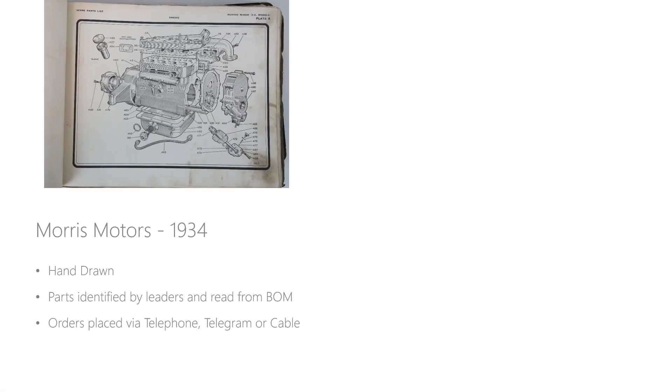As I was saying earlier, things haven't really changed much in the last 80 years. Morris Motors had hand-drawn diagrams. Parts were identified by leaders and read off a bill of materials and ordered by telephone or cable. Fast forward to 2019, not much has really changed. 2D exploded drawings are very time consuming to create, and again the parts are identified by the same process, read from a BOM and ordered by telephone and email.

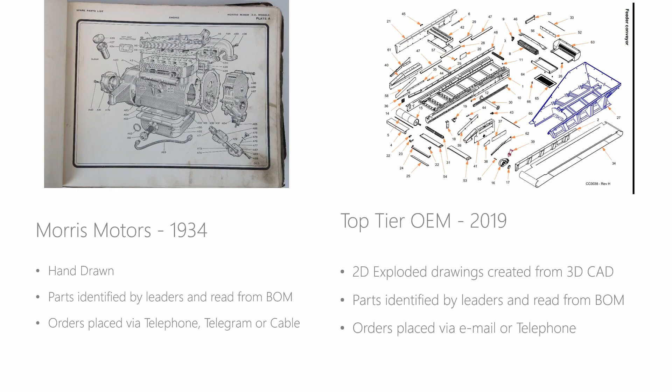Fast forward to 2020, what we're trying to do is create a whole new category around the aftermarket division by creating 3D part manuals from a company's native CAD files and assets. We really reduced a lot of the downtime, which I'll go into in a moment, but we stitched together that whole process and made it a lot more intuitive, as you'll see from the demo.

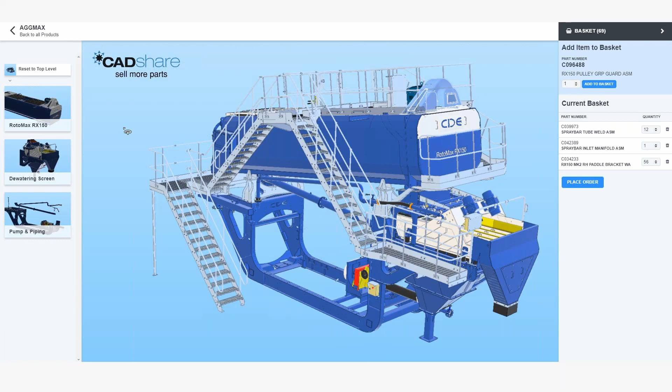You've got the actual 3D model, and you can click on a part, and that will link to your parts data, and you'll get a notification of the part, the stock level, and price. We're trying to build a whole ecosystem around the aftermarket. Obviously we have the cloud software, which is strong for part identification and ordering.

We're building on all of the business insights and analytics, because we're capturing that data in the back end, so you're going to be closer to your customer and get more insights into what they're ordering from you. We have a full technical documentation library that you can attach different file types and videos to those models, plus open APIs as well.

We built CADshare in a way that's customizable and links into a company's tech stack, whether it's their PLM, ERP system, and so forth. We're just that layer inside the process to make it easier to order the parts, so very flexible in that way.

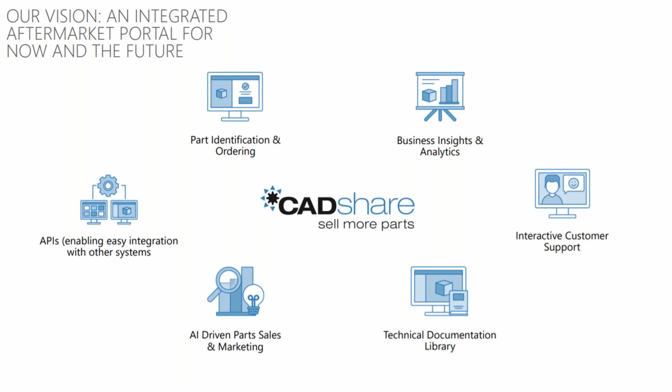So just a couple of the main points that CADshare really helps with. One of our main headlines is we're 90% faster, so we reduce 90% of time for resources to create this technical authoring.

In the old way, you had to pull together all of the BOM data from a PLM or Excel, which is quite slow. Then you had to edit that part data and description data because it wasn't in real time, wasn't pulling through from a database, so the two didn't link up as well. And then you had to create a lot more exploded views, which took a lot of time.

Coming forward into CADshare, engineers just prepare a pack-and-go file. It's uploaded and ready to use in 5 minutes. It's their native CAD files that we put through the translator in Autodesk Forge, creating those models. So there's no real CAD skills needed, and no need for a high-spec computer, because everything's done and processed through the cloud.

Around part identification, we're 85% faster than the old way, and we reduce wrong orders by up to 95%. There's a lot of value in being able to order parts from the customer or dealer point of view—they can go in and locate those parts with ease, rather than digging through a parts book to find the relevant part, which may well be obsolete by the time it's published after 6 months.

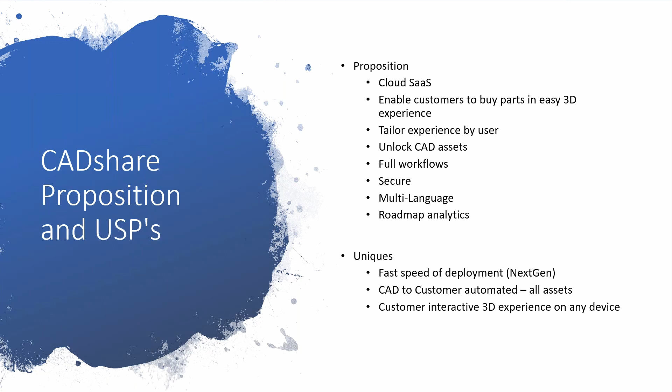What we do really is take all of your native CAD assets and reuse them to create those 3D catalogs with ease. And then you have the full workflows, and it's very fast to deploy, with low cost of setup as well.

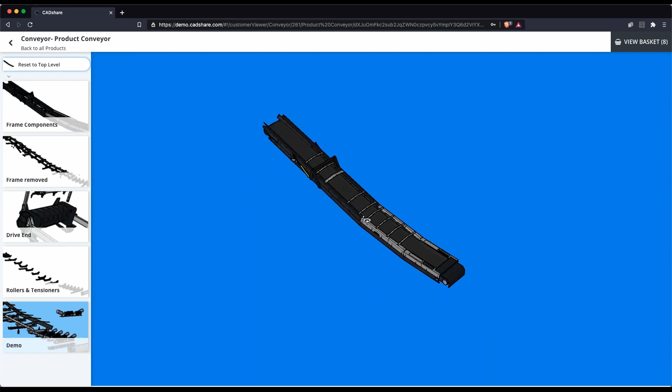So then into the actual viewer. Your customer will log in here. This is all live, so that's how quick it can load. The customer can zoom in and out, they can pan, and they can rotate, all using the mouse or a touch-enabled screen.

When we get here, you can see the whole model, it's got its full context. It's not initially exploded, it's not hard to understand where the parts are. You can quickly see if it's an exterior part. I can just click on it, it'll pop up, tell me what the item number is, give me a description, and I can add it directly to my basket.

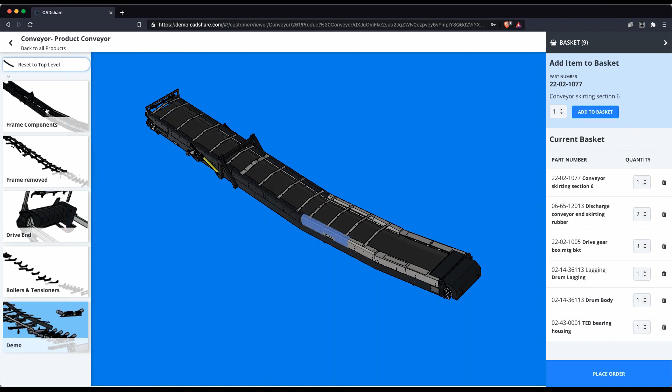Then we can simply use the snapshots on the left-hand side to step down into different views that are created using our system. These again make it so you can show and hide different parts to make it easier to find the one you need. If we take this one here, it's hidden and moved us down into another part of the model.

You can quickly see here that we can enable assemblies. So for this part, you can buy the individual wing roller, or you can select the assembly and purchase the whole impact rollers. That's good for parts where you can buy the whole assembly or not.

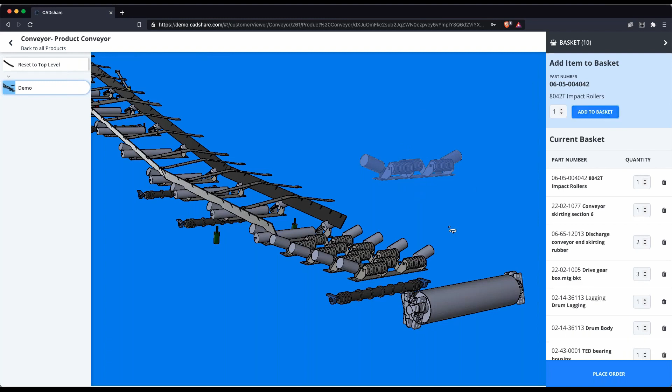Also, we have the ability to select options within it. So if they have different types of coating or materials for the different parts, these are easily set up so you can purchase the different types, and they all have a unique part number within the system.

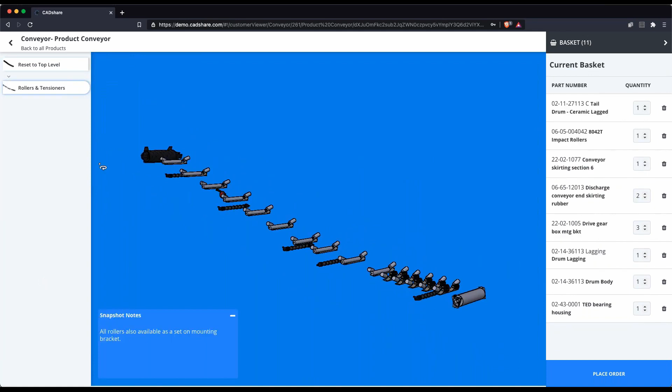Those all just make it a bit easier to step down through and see the parts in the system. You can also add notes when you're looking at a view to explain something about the view or what the customer would need to understand. You can also turn on ghosting, which keeps that context of where the part is within the whole machinery.

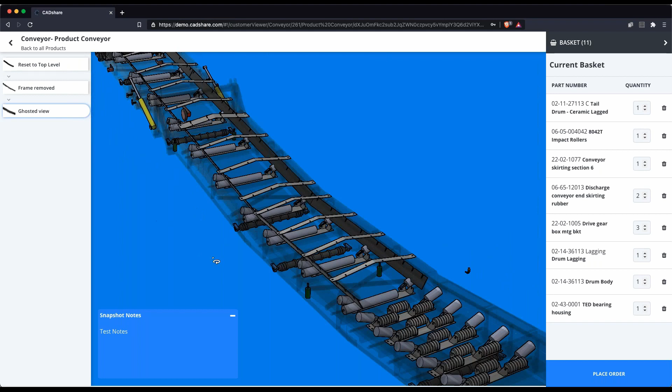This is one of the things that helps massively reduce wrong orders, because with this I'm able to say these two parts here were slightly different in my model. I'm able to make sure with the context of, okay, it's the one just below the three runners, that you can get the exact right part. This is one of the big things, because you keep all the context within.

While in a traditional 2D part manual, you'll be looking through the pages and you don't know, is page 57 this section up here or this section up here? So this keeps that context for the user.

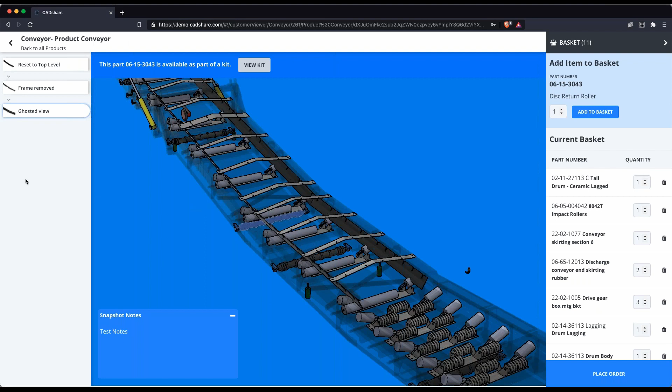Once I've added all my parts to the basket, I simply click through into the basket page. Just your standard Amazon-style order page. I can see all my parts that I've added. I get some details of where they were added from.

Oh, sorry Max. Can add a comment to just check that this is the lagging for processing sand, just to make sure.

Add that to the order, and the manufacturer will then see that. Enter in my requested delivery date, and as simple as that, you submit your inquiry, and the manufacturer will receive an email to say the order's been placed, and they'll be able to respond with a quote immediately within the system.

Also here, you can see technical documentation. This is one that's been linked to the part individually, so you can see how I change it or add it, and it'll link directly to the right page within the PDF manual.

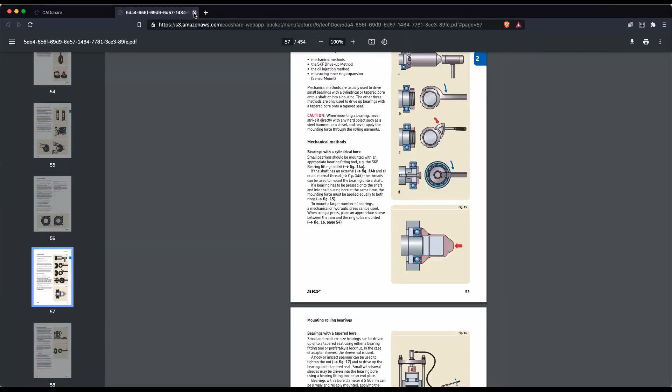So that'll then get sent over to the manufacturer. Once they respond with a quote, we'll get an email to say a quote has been sent. We can log in, we'll see the prices, shipping, and then we just simply enter our purchase order number and place the order, and that's it done.

It can be as quick as 5-10 minutes to get the order placed and processed through. And the same, you've got the live order history of when it's being shipped, and your order history is all there in one place for your customers to track and see how things are going.

Especially for dealers, we have a part search, so most of your dealers will already know their part numbers, and we find that they don't necessarily always want to go through the 3D viewer to find them when they know, oh, I just want 74402. So they can just do their search, pop it in, it'll bring up their part, they can add it to their basket. And similarly, we have their most frequently ordered and most recently ordered parts, a list of them, just to allow them to do things quicker and easier.

So that's the customer side of the product. As you can see, it's very simple, very straightforward, and very easy to use. And we'll just log in as the manufacturer.

So similarly, first thing they will see is they get their orders. I can see the inquiry that was just submitted. So I can come in, prices that I have ERP data for will auto-populate with their price. Any others that haven't been used in the system yet, I can just pop them in, and then just check the price, sanity check them, add my shipping or discount, and I can view my comment that was sent to me. I can respond back to the customer.

And then the other part is creating our technical authoring. So simply I'll find the one that I showed you in the demo. So log in here, and again, same sort of functionality, move, view, zoom.

In here, we also then have the parts, all the parts in the system through the model tree. So we can look through and we can choose which ones are shown or hidden by simply turning it on or off here. We can lock parts as well.

So if there's an assembly and we don't want, a lot of times some of the assemblies will be your holy grail, so you don't want people looking inside it or looking beneath that level of a part. So you can just lock it, and then whenever I try to select it, that's all I'll be able to select. I won't be able to go any further down and see the other sub-assemblies. That's just locked.

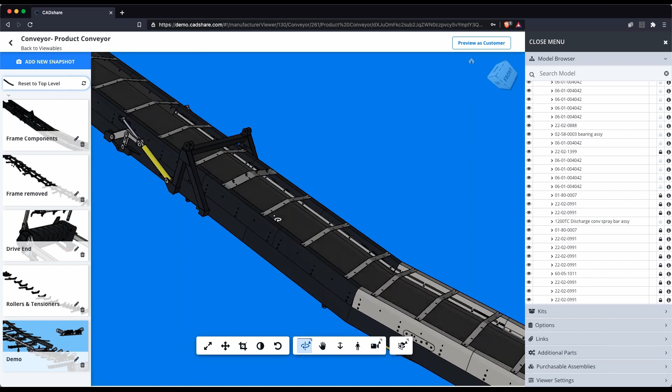And then to create one of the views on the left-hand side that we've shown, you simply move the model into the shape I would like it to be and hit add new snapshot. That will quickly save it. And then from now on, if I click that, it'll bring me back to that layout.

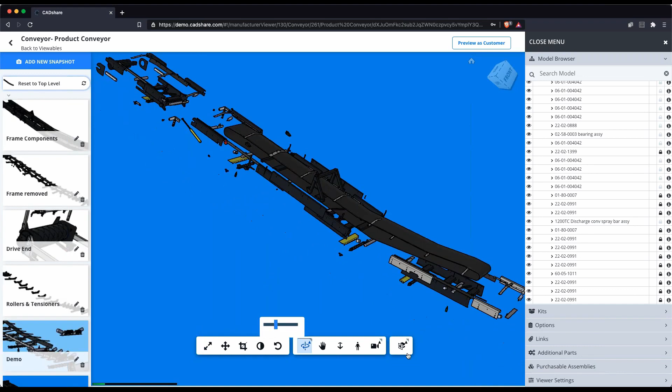So some of the things you can do for those layouts, we can quickly explode parts. That will allow us to see an exploded view, and we can tailor that up to lots of explosion or a little bit less.

We can translate parts to create our own views very quickly as well, by just simply clicking and dragging them into the position we want them to do, make it easier for the customer to identify them. And then, as I mentioned earlier, we can turn on the ghosting, so it'll show where the part originally was when you've moved it out of. So it's a lot easier than an exploded 2D drawing and an arrow hopefully indicating where that was previously from.

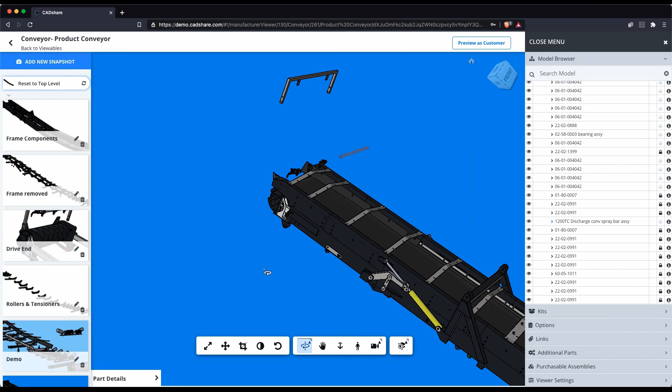But it's as simple as that. Normally, we can make a full manual in this way within about 15-20 minutes. It takes a lot less time than a traditional 2D document to draw, because the context is still there with the rest of the model and the 3D elements - you can rotate it to see where things attach. It makes it a lot easier, so you don't have to spend as long moving all the parts individually and drawing leaders between them to make sure it's obvious where they came from. The context is still provided.

And then similarly for parts, we have the same ability to search for a part in the system. So this will be the other half of the system - we take in the BOM files into the system, and then we can update stock and price. So anywhere that this part appears in any model in our whole system, we'll get this stock and price. We can link a technical document to it, or supersede it and replace it with new parts. All this functionality works on that part in every single model.

So it's really quick to update. You decide that from here forward, we are replacing this with 108.707. We simply say replace, choose where it's happening, and it can link, supersede, links you to another one. If we're changing the part, we do that through a different part of the system that I'll show you now.

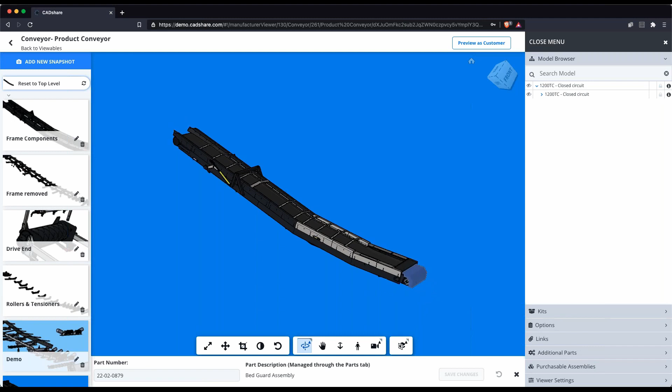So that was the other thing Marcus had mentioned, the update time for your customer. So if I decide that this part is now being replaced within our system, from now on it will be this new part number, and then I just click save, and that's already through to your customer. That's another way we save on errors in ordering, because we've replaced this part within the system - we decided the first one wasn't effective enough, or it was wearing too quickly, so we've modified the design, and now anyone who tries to buy from this conveyor will get the new updated part. They're not looking at an out-of-date paper manual in their office - they're straight through to this. That's instant. If I log back in as the customer, this will now be the new part.

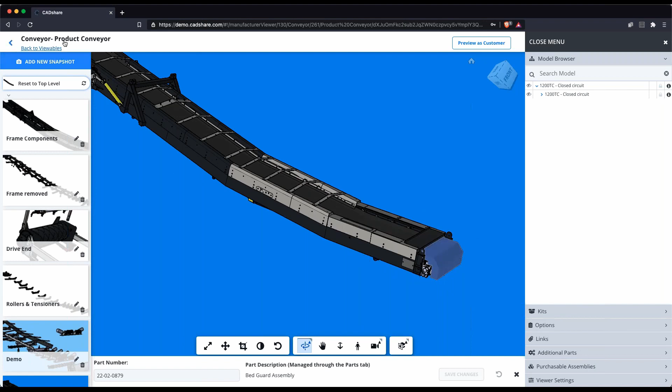So I think that is a very quick run through of what the system does. We have some security features as well. You can turn on multi-factor authentication to make it as secure as possible. We have alert-based logins, so whenever a user logs in from a location that's not known to us, we'll send the manufacturer an email to let them know this user account has logged in from a new location, and you can choose to block that access if you think it might be fraudulent. We can also enable a watermark over the viewer, so it says something like your logo in place, so it's all branded and people know it's official, proper stuff from yourselves.